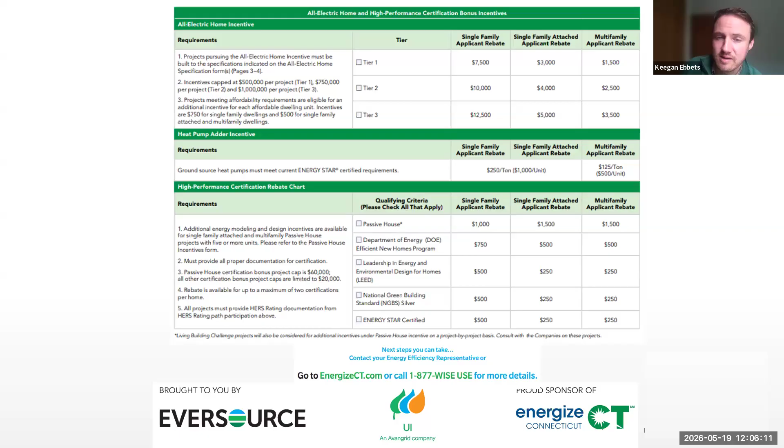Thank you very much, Keegan and Sarah, again for hosting and all the participants for joining us today. What we're going to be talking about specifically is emerging high performance glazing technologies. As building codes evolve and the landscape, as you all very well know, changes very rapidly, both windows and fenestration in particular are one of those levers that are very important within the building.

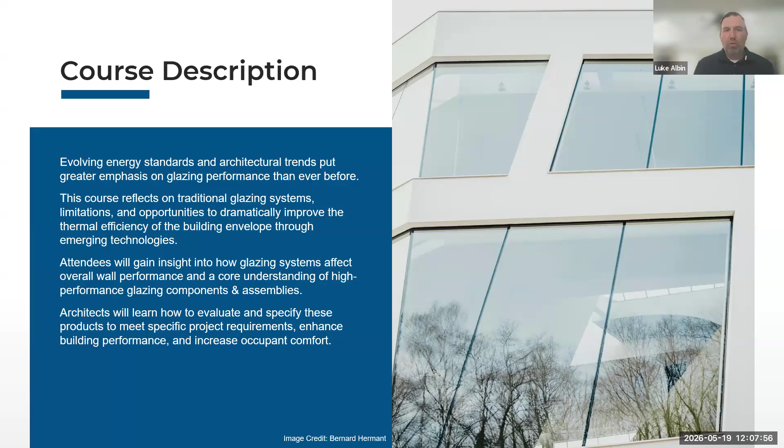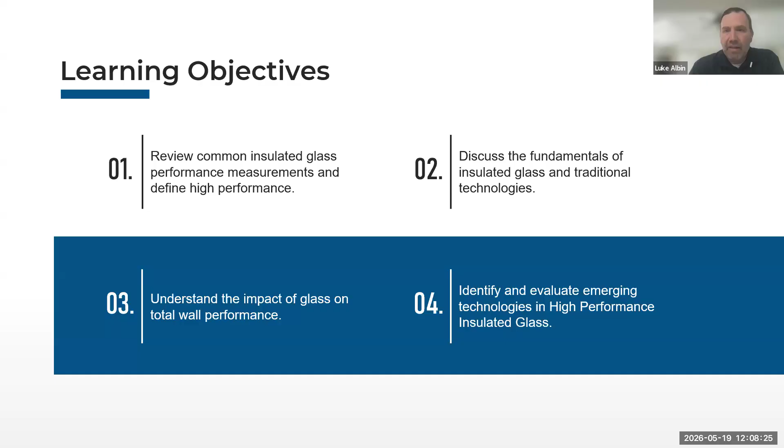So as I mentioned, we're going to be looking at insulated glass performance. This course really revolves more around the glass itself. There is some information on frames and other window materials, but really it's about how the glass interacts with the building, what those fundamentals are, and what we have in the market now that's really cool new technology.

So we'll start off with a quote from Amory Lovins. If you don't know who he is, you wouldn't be the first to say you're unaware. He's an American physicist, and was a co-founder of the Rocky Mountain Institute, a think tank which advises the Department of Energy on a lot of their building codes throughout the country, and has been doing it for decades. His quote: all of the energy pumped through the Alaska pipeline each year goes literally out America's windows.

So as a window manufacturer representative, this is a pretty strong statement. First inclination would be to defend against it. But when we take a look at glass and windows themselves, what we're looking for are a bunch of different things. We're asking the windows to do a lot.

We want to be able to see out. Obviously, nobody wants to sit in a dark room all day, so we want to be able to bring the outside in, as they say. With that comes thermal insulation and the comfort of the building occupants. That includes managing sound, UV rays, and potential condensation issues, all of those things being handled by the windows themselves, but it has to tie into the building.

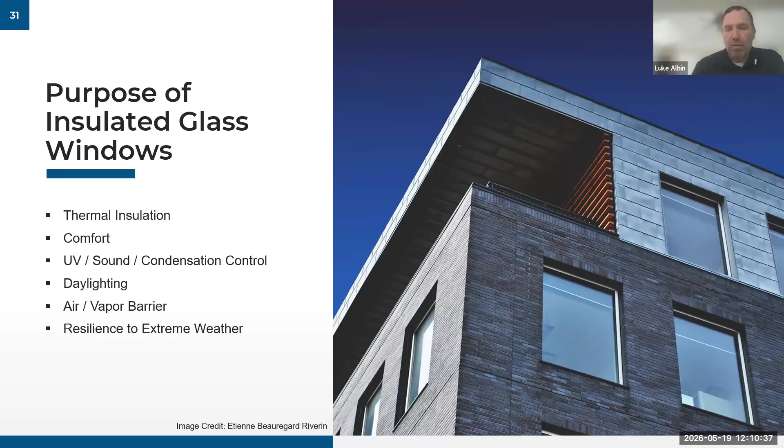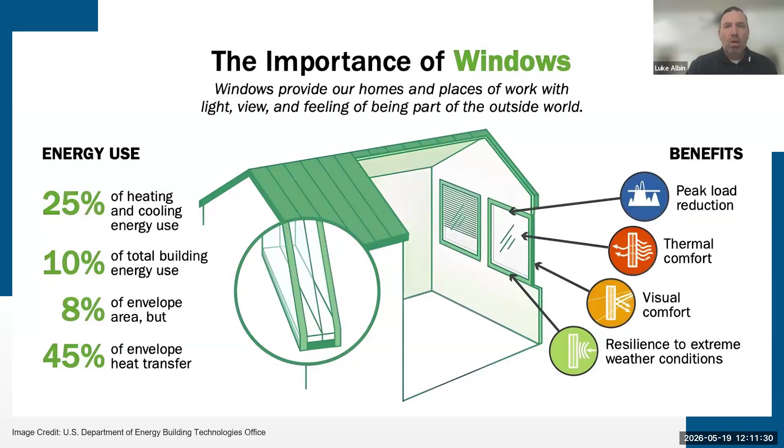Heat transfer - why are we concerned about it? Well, again, we're in a cooler climate zone, so we want to keep the heat in. Our heating season is much longer than most others, and heat transfer occurs through three ways. Conduction, which is through solid surfaces, so that's where the frame of the window comes into play. What is that frame made out of? Is it wood, fiberglass, vinyl, or aluminum? Is it thermally broken? A lot of factors happen there.

Also, the insulating glazing unit spacers themselves - what is the solid material around the edges of the insulated glass unit? Those are made of different materials, and those also have different rates of heat transfer.

Convection - where that lives within the windows themselves is primarily in between the panes of the insulated glass unit. So what we do is use gases that are more dense than air, so as heat tries to travel through the assembly, it slows down with those more dense gases.

And then radiation - we also want to be able to capture the passive heating nature of the sun. Radiation can also equate to heat, radiating out as well as radiating in. So we manage that primarily with low-E coatings within the glass.

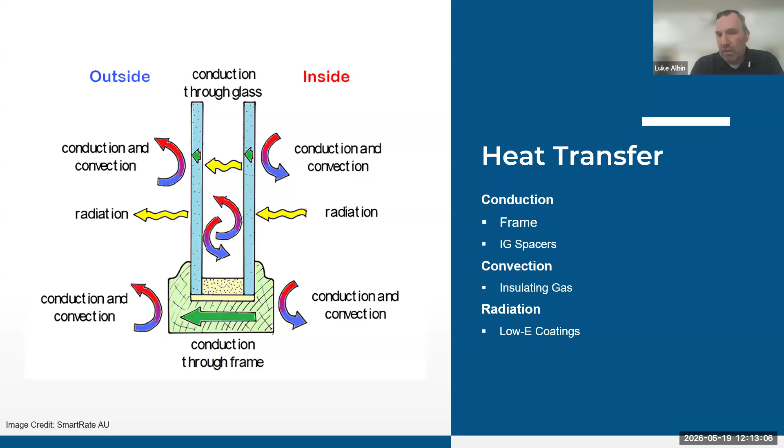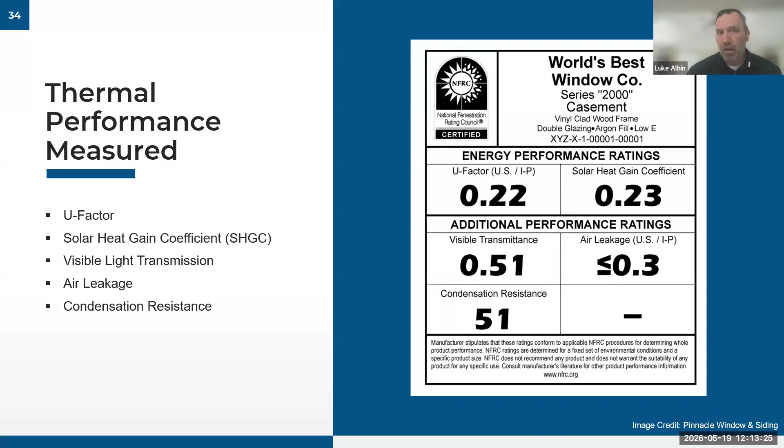I'm sure all of you have seen these window stickers that are on all new windows. This is from the National Fenestration Rating Council, and it's really just a snapshot of the thermal performance of the windows. So just to dive into these briefly - U factor. U factor is the insulating capability of the window.

It's an ASTM test. Those test parameters are 70 degrees inside, 0 degrees outside, 15 mile per hour sustained winds, and then that insulating capability is measured. The U factor is simply the inverse of the R value. So for example, in this case we've got a U factor of 0.22, which is just shy of an R5 window.

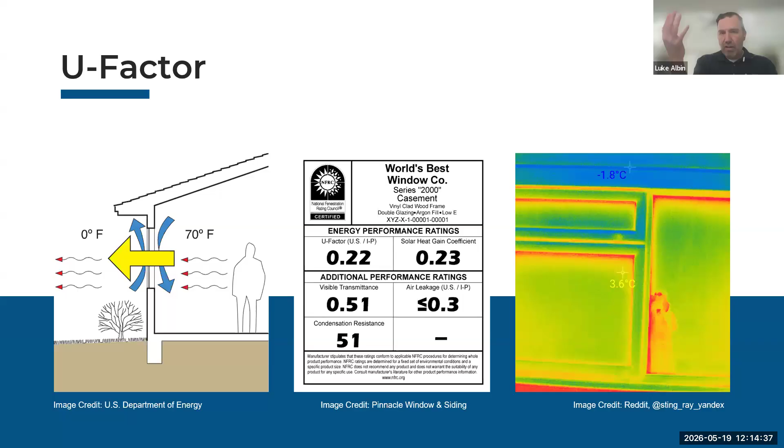You'll notice in the thermal image, this is from the outside looking in. You can see with the thermal image, the orange red areas are where heat is being lost from the building to the exterior. We're real close to those ASTM test parameters here. The orange red areas are where we're losing heat.

Solar heat gain is managed by the low-E coatings. As I keep mentioning, we're in a cooler climate zone, so we want to take advantage of the passive heating of the sun, whereas Florida, Texas, New Mexico, and similar climates want to do the exact opposite. Their cooling seasons are much longer than ours, so they want to keep heat out via radiation, which we manage with low-E coatings. Solar heat gain is that metric.

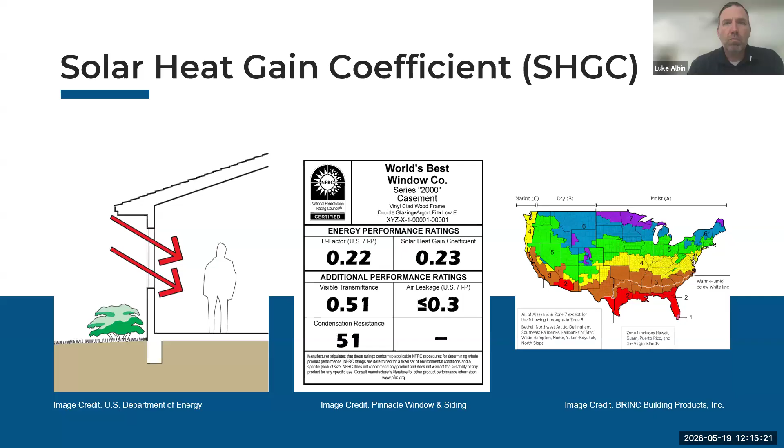Visible light transmittance, you see here, is measured at 0.51. That's our percentage, so 51% of visible light is transmitted from outside to the interior. Note that this measurement includes the frame, which you obviously can't see through, but there are also separate glass-only or insulated glass-only metrics, which you may see as COG, or center of glass, values for visible transmittance. So the visible transmittance of the glass in this window, factory assembled, is 0.51. It may be 0.65 for the glass alone, so something to keep in mind when specifying glass specifically.

Just to touch on air leakage - this is a very basic air leakage here, 0.3 CFM. When we're looking at high performance buildings, we're more looking at 0.03 and below, particularly with operable windows. Fixed windows are more like 0.01 and less.

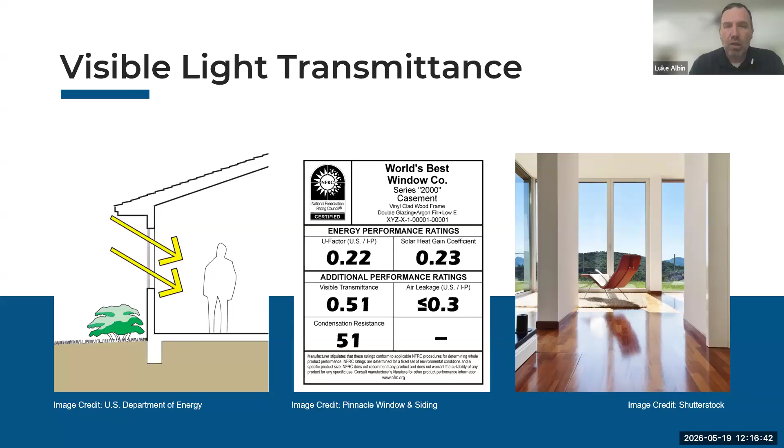Lastly, we have condensation resistance, which, believe it or not, is optional to be posted on these NFRC labels, but has the ability to be one of the more overlooked thermal performance metrics when looking at windows. The number here is 51 - the higher that number, the better the condensation resistance. Hopefully nobody has a situation in their own home like this picture here, where you see water on the interior.

I do, unfortunately - usually it happens in the fall when you turn the heat on for the first time. It's really a relationship between the relative humidity within the building, the center of glass temperature, but also what's going on outside - what's the dew point. There are a lot of different factors, but primarily the relative humidity within the dwelling, as well as the surface glass temperature, really drive the preponderance of condensation.

Just to give an idea of recommended numbers in some major US cities: say, for example, relative humidity within the building is at 40. Looking at the Atlanta area, this would do a good job at 50, 51%. I'm located in the Boston area, so we're really closer to 60. As you get into even cooler climates, you see it approaching mid-60s, even 70 in Minneapolis, for the recommended condensation resistance factor. Something to keep in mind.

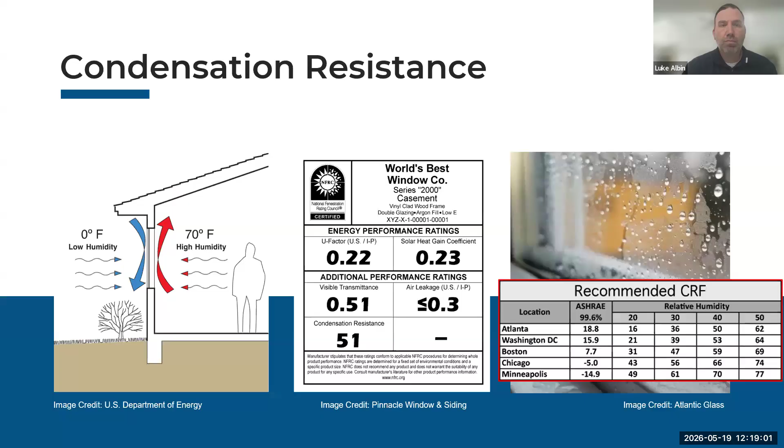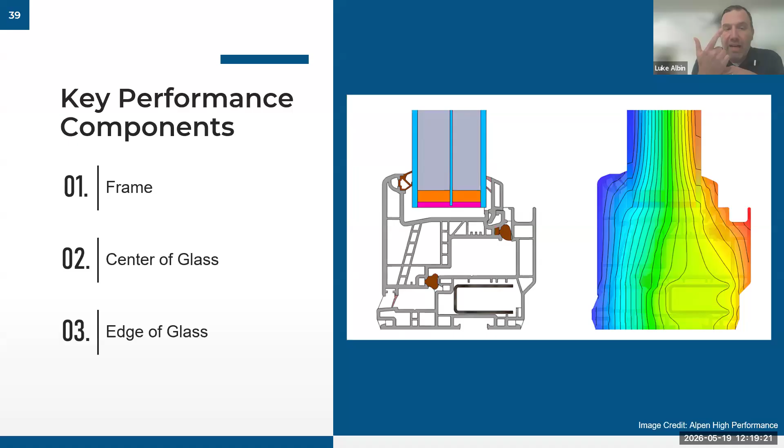So when we're looking at a window itself - and for those who have worked on PHIUS projects, you'll notice that if you go to their certified window database, some key performance components are pulled out and measured separately: the frame, the center of glass, and the edge of glass itself.

So taking a look at building codes and where we were versus where we are now - take Energy Star, for example. A little over 10 years ago, the Northern Climate U-factor was 0.30, and any solar heat gain was sufficient for an Energy Star rated window. Fast forward to today, and now we're at 0.22 with a recommended solar heat gain coefficient.

May not seem like a big jump, but if you take a look, well, 0.08 when you're talking about U factors, but remember when we're thinking about R value too. So your R value of that window, say a dozen years ago, is about an R 3.3. Now we're looking at an R almost 5 window.

That's a pretty significant jump, particularly for domestic manufacturers who have standardized on the geometry of a dual pane window system. That 0.22 number really reflects very close to the limit to which dual pane products can be, particularly again in our cooler northern climate zone.

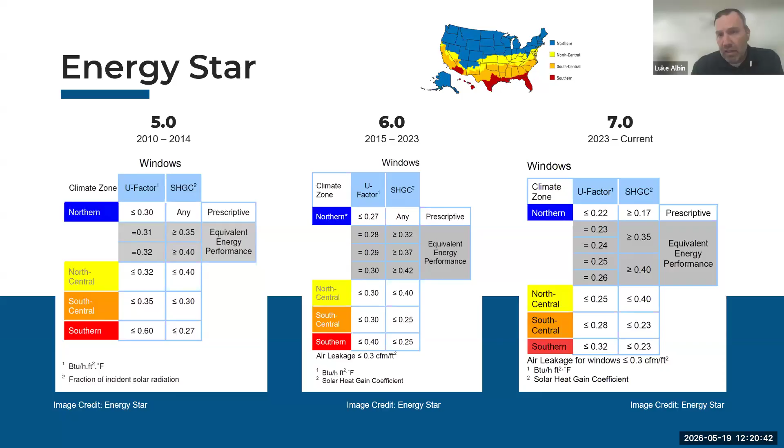For Canada, just as a base point, it's even a little more aggressive. So last year, all their residential windows, when you do their conversion, they're looking at a U factor of 0.21, and by 2030, their goal is to be at a 0.14. So 0.14 is you are 100% out of a dual pane system. Some customers are even looking at not only triple pane but quad pane windows to try to get to that number. But there are a lot of different strategies to get to that number.

Adoption of glazing technologies. Again, we're talking about where we were. So taking a look back at 1970, this gray line here, single clear glass, about 90% of the market. There is still, by the way, a tremendous amount of building stock out there right now, particularly commercially, that is just a single clear piece of glass.

It really wasn't until, and you'll notice, late 70s, early 80s, where this blue line, a double clear glass pack was used, really in response to the energy crisis here in the United States of the late 70s, early 80s, in the oil embargo time. Fast forward to the mid 90s, is really where the low E coatings took effect, and that's where we are today. Now, close to 90% is double low E coated windows.

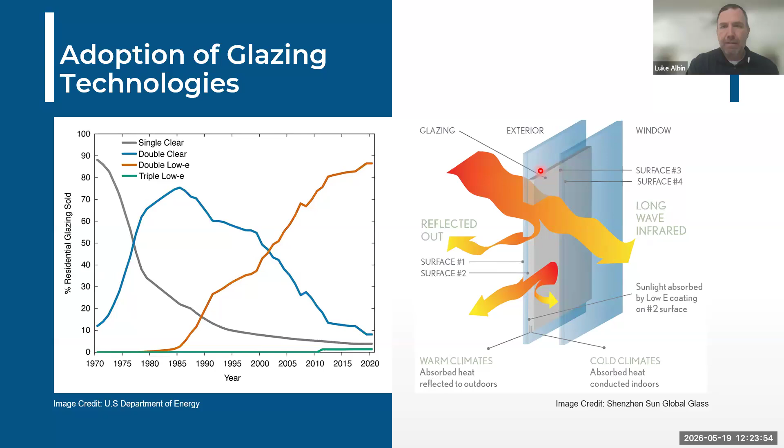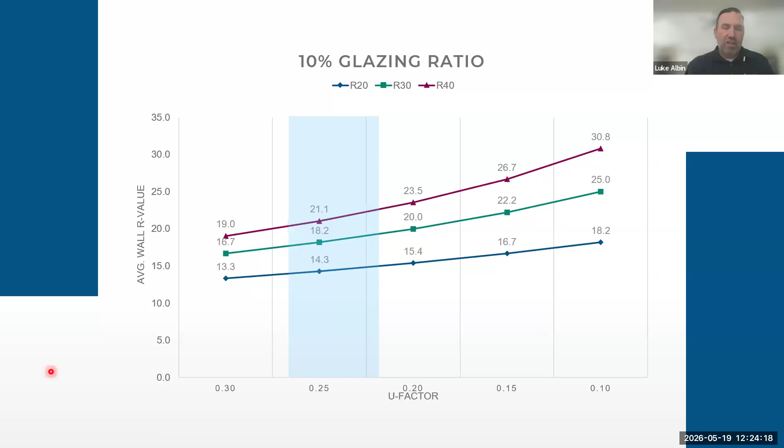When we put these windows in, how does it affect the overall wall assemblies? I know we're always trying to strive to get to a certain window to wall ratio. Well, this chart shows the average wall value, and then on the horizontal axis here, you've got the window U factor. So we're starting off at 0.3, and as you move from left to right, you get a better performing window. So this is a 10% glazed area. You'll see an R20 wall, R30 wall, and an R40 wall.

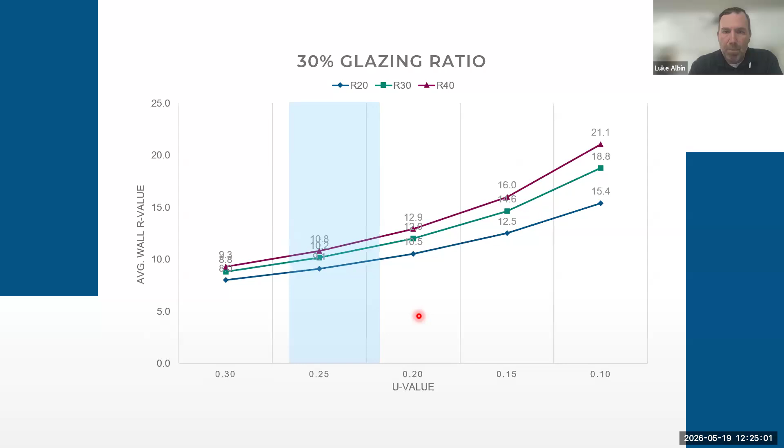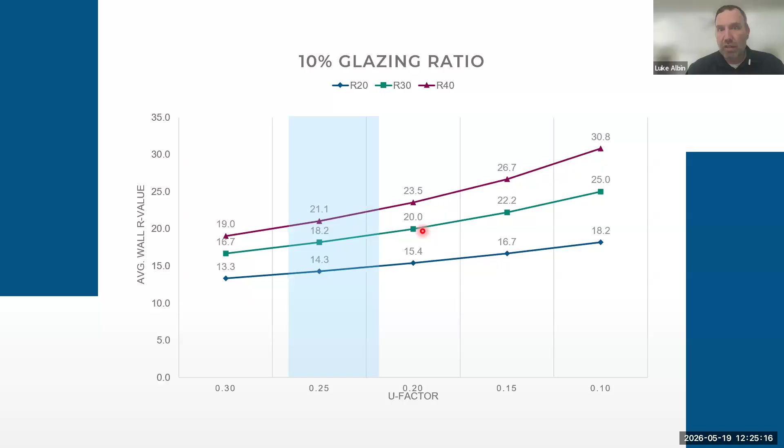But as you increase, just pay attention to this area here, between the 0.20 and the 0.15. As we move up from 10% to 20%, to 30% glazing ratio, you really can see where the windows are getting closer to the wall's R value. So you really have more of an exponential benefit to using higher performing windows to get closer to the walls. So as you see here, 20% and then 30%.

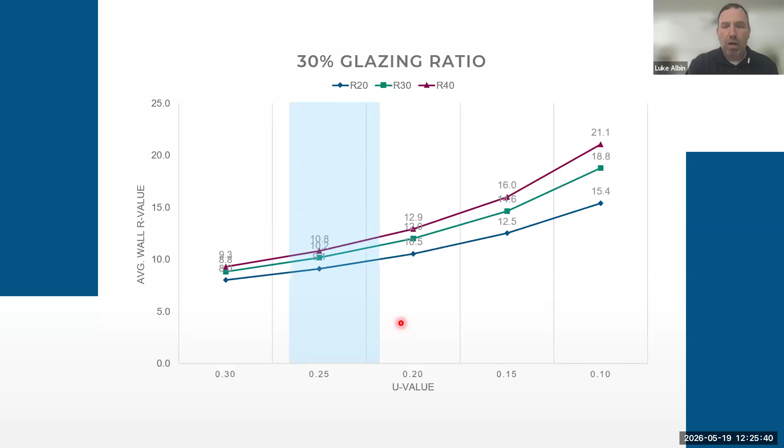So this is where primarily high performance windows will start off, between this 0.20 and below, again, because of the relationship with the wall itself.

So this is the only question here that we have in this presentation. But if we take this example, if we have a wall that is an R20 wall, 50% glazing area, and a window U factor of 0.30, which again, if you think about it, is an R3.3 window, what would that overall assembly of the wall be when you take in this equation here that you see?

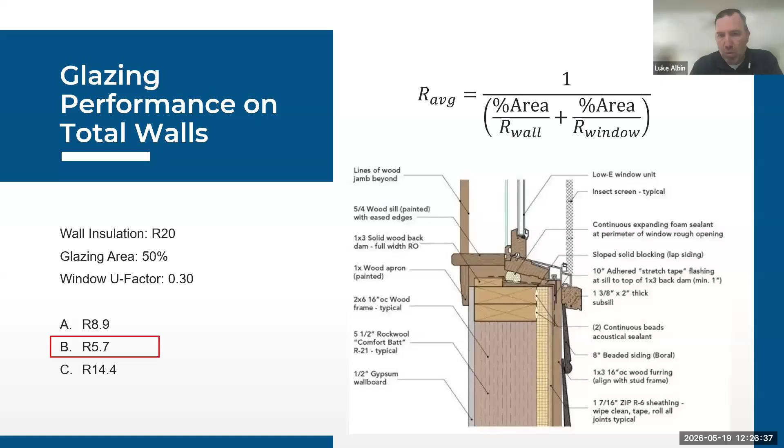Well, we find that with the R20 wall and an R3.3 window, the window has dragged this entire assembly down to an R5.7. So pretty significant difference there. Here's just a typical example of an R20 wall, detailed out. But we want to get better performance out of our wall assembly.

So what we're going to do is we are going to use R40 wall insulation. Same glazing area, 50%, same window U factor of 0.30. So when we do that, you see here's some extra material, extra labor, extra time to detail the R40 wall versus the R20 wall. A lot of different factors go into building this insulation out, as you all have probably run into.

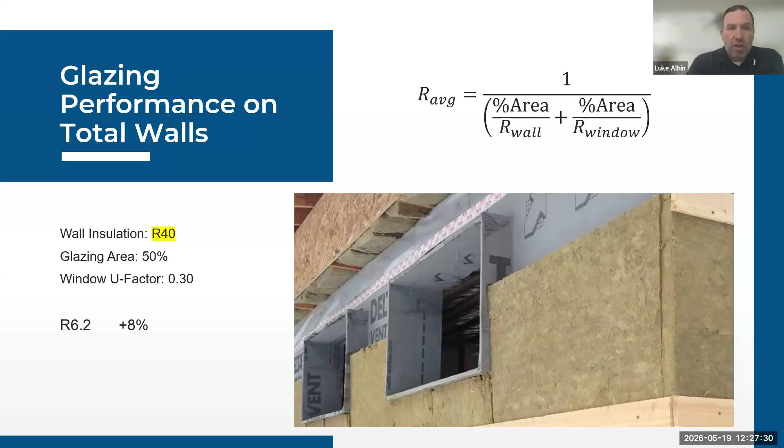So we've done all that, and now our assembly is 6.2. We've gained a whopping, not so whopping, I should say, 8% increase over 5.7. So instead, we're going to put a better window in. So wall insulation R20, same glazing area. But instead of the R3.3, we're going to use an R5 window. Now we've gone from 5.7 to an R8, so a 40% increase.

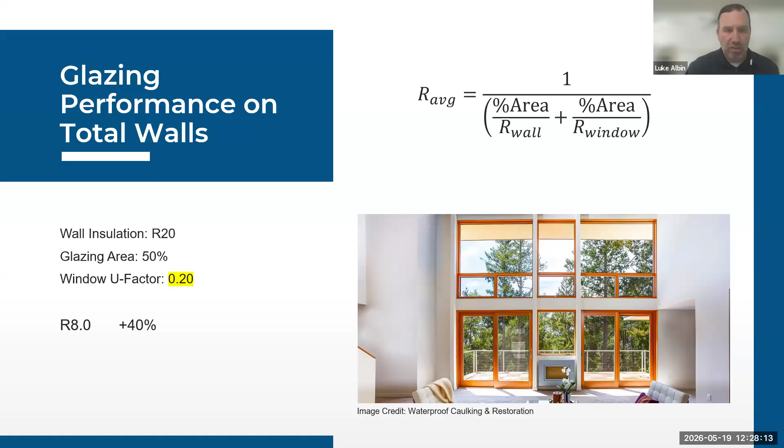So this is just to show how significant, and I realize that 50% glazing area is pretty substantial percentage-wise. But you can see that there's really a much more dramatic effect simply by using a better window than having to build out the wall insulation itself. So how do we get there? How do we get to that 0.20 number, or the R5 number and below? Well, the quickest, easiest, most efficient way to do that is to add another pane of glass. So instead of the dual pane, we are using a triple pane.

So you can see here, let me pull my pointer up. There it is. As we look at the triple pane here, you still have a low-E coating, shown in red here. What is nice about the triple is now we have the ability to add another low-E coating to the interior of the IGU. So we still number these again: 1, 2, 3, 4, 5, 6. Now we have a low-E coating on surface 2, and we have the option, or not, to have it on surface 5 as well.

In a dual pane system, thermodynamically, it's not advisable to have a low-E coating living within the IGU on surfaces 2 and 3, because one is a passive heating low-E coating, the other is a reflecting low-E coating, and it heats up this area too much. And so it's just not done within IGUs primarily for that reason. But with this barrier, you've got two separate areas, one more influenced by what's happening outside, one more influenced by what's happening inside.

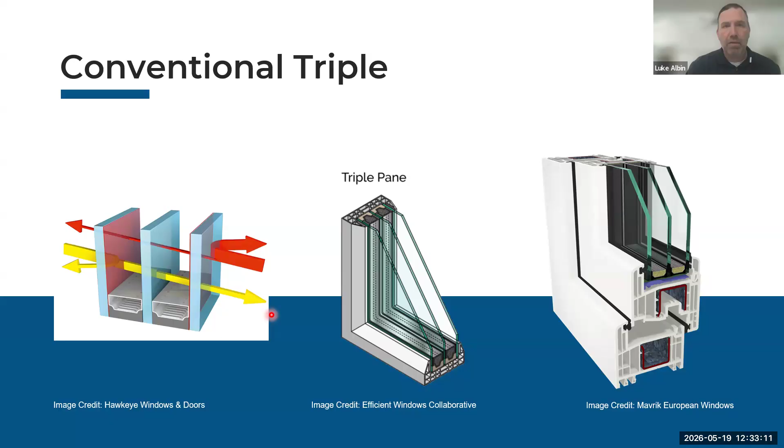But the other thing that needs to be considered is the weight. We're adding all that weight, so particularly on operable windows, we're also looking at upgraded hinging and hardware to support the weight of those operable sashes as well. But this is how we get to 0.20 and below.

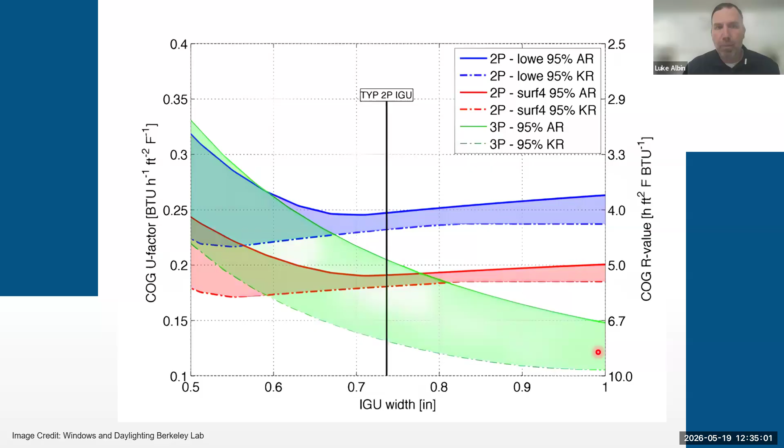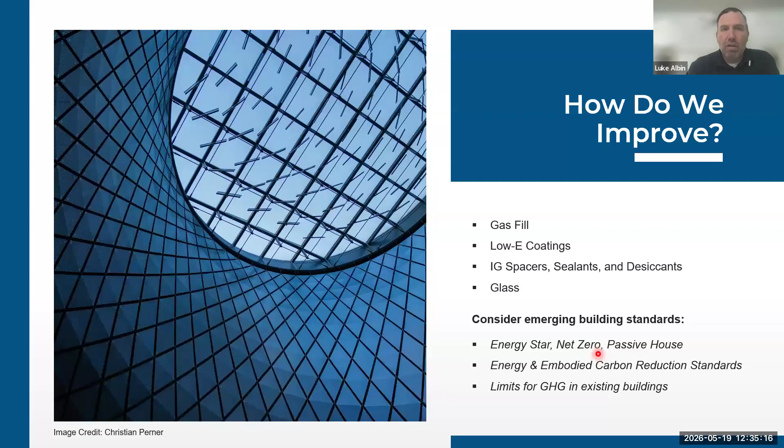So that's how we improve. But there's a couple of other things that we can do over and above adding the triple pane as well. And we talk about gas fill, which was referenced in one of the previous slides. So as I mentioned before, from a convection standpoint, we're trying to slow down the heat transfer. And we do that by using gases that are more dense than air.

We started off with air. We are now on argon as the standard. Argon is very cheap. It represents about 1% of the atmosphere. So it's very readily available, easily used in manufacturing. Really, this is the standard.

So much so that many times in automated lines, it's more expensive to say, you know what, I just want to go with air instead of argon. To turn off that function on an automated line is now a custom option. That's how standardized the industry is on having argon as a gas fill.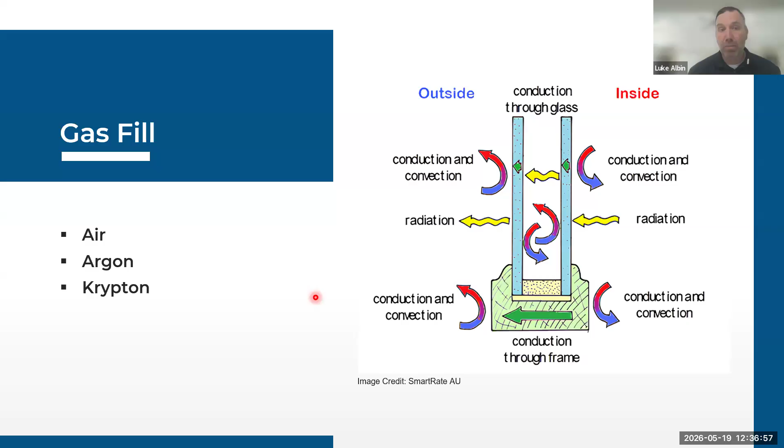And then we have krypton, which is about twice as dense as argon, a little less abundant, a little more expensive than argon. But if you had an opportunity to price those two out 4 or 5 years ago, there was a significant difference. There have been advances, not only in technology, but on the business side of things. There are some antitrust things going on. Krypton now is very affordable, or should be affordable, when you're looking at it compared to argon.

Xenon was used years ago. As I mentioned, argon is about 1% of the atmosphere. Xenon is like 87 parts per billion of the atmosphere - very rare, very expensive. They used to use a special cryogenics harvesting process for it. There are other technologies out now that are much more budget friendly.

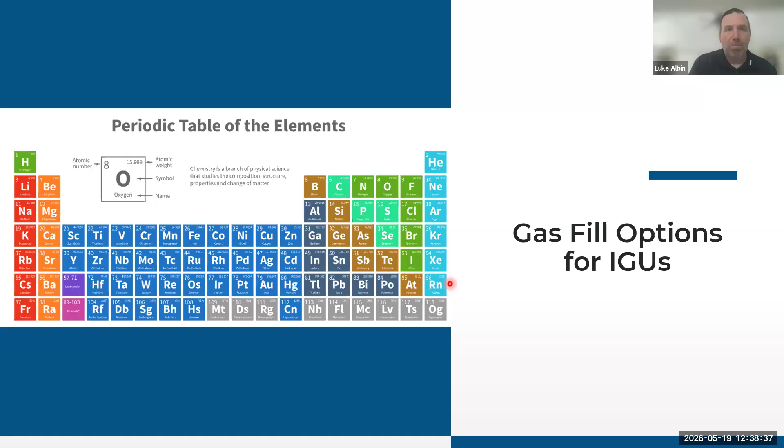So Xenon's pretty much been left to the back burner of IGU technology. And then, of course, radon, which hopefully nobody's testing on windows. So that's the gas fill.

Going back to conduction, and referencing when we talked about edge of glass performance, that's one of the three things that PHIUS and other high performance systems will pull out and measure specifically. This is what affects edge of glass - the spacer.

This metal spacer represents 90%, if not more, of what's out in the market. It's very easy to use, very easy to manufacture - just a stainless steel, flexible piece. It turns the corners, is easily manufactured and pliable so it can turn all those corners of the IGU. It's simply put in a bed of silicone.

This white area here is desiccant. There's a little bit of weep system, so any incidental moisture between the panes of glass during manufacturing can be pulled down into this desiccant area. However, as you can guess, metal is very conductive from a heat transfer standpoint, and that's what we're trying to get away from.

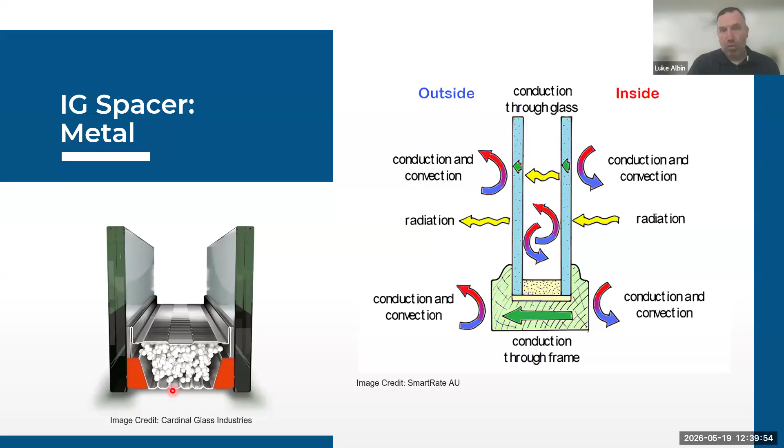Looking back at the thermal image from the beginning of the presentation, you'll notice these dark red and orange areas are around the IGU. That's where this metal spacer lives, and that's why we're looking at better technologies other than metal for edge of glass performance.

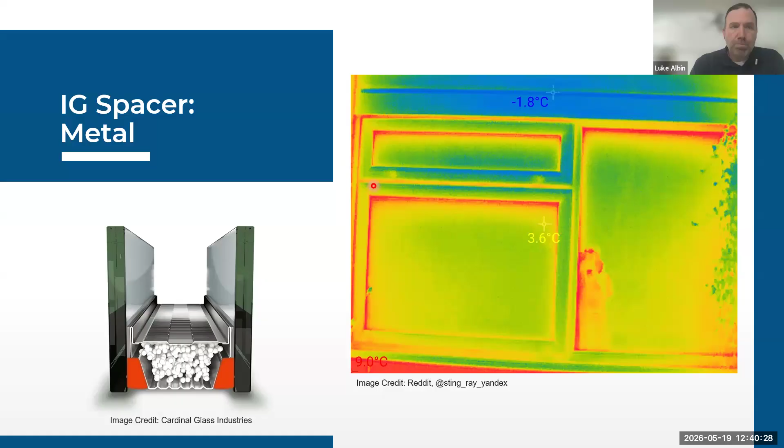Again, this is also a significant contributor to condensation resistance because we're talking about temperature versus relative humidity. So we now have, and have had for quite some years, the warm edge spacer. Primarily it's a dense foam product, and that foam has much less heat transfer than your stainless steel spacer. That's typically used within the high performance window range.

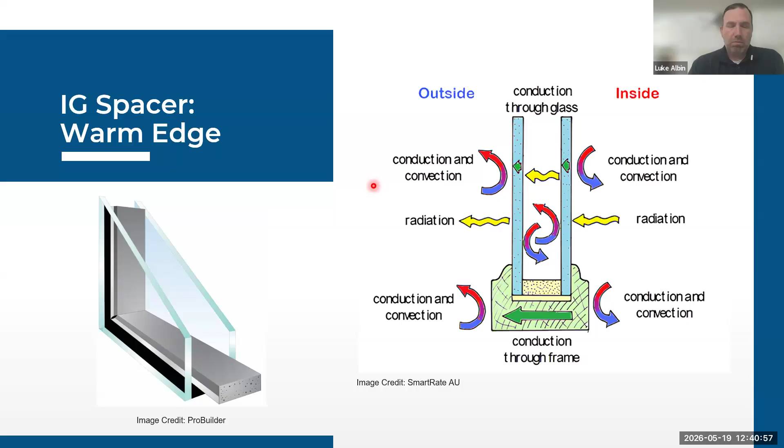But there's more - a subset of the warm edge spacer is the thermoplastic warm edge spacer. The best way I can describe it is it's almost like a hot melt glue that cures. What happens is it bonds itself not only to the silicone bed but also to the glass as well. When we take a look at our climate zone, that thermal expansion and contraction is happening.

Not only with the window frame itself and the interaction between that and the IGU, but also the IGU itself. As that flexes in and out with thermal expansion and contraction, the thermoplastic spacer moves with the glass. I'm sure everybody has had the experience of seeing a window that looks like it's raining in between the panes - that seal is broken.

Any gas that was in it has dissipated probably long ago. Condensation is building up on the inside, but that seal has failed. So as you can imagine, when you take a look at a metal IG spacer bar, it's not going to flex with it, and that's typically where the seal failures happen.

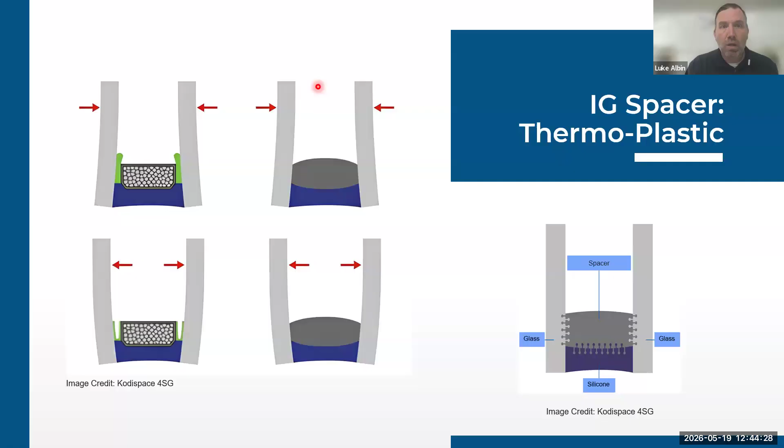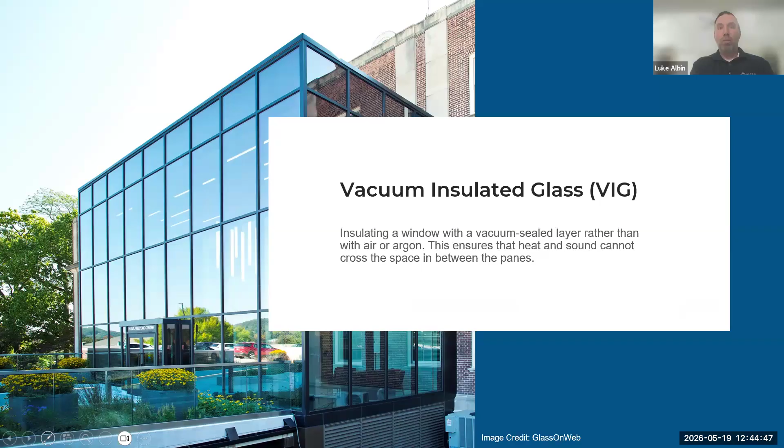So we talked about where the industry was, kind of where we are. Now it's time to talk about some really cool new technology that's out in the marketplace now, again in varying degrees. Vacuum insulated glass. I know this is making more and more of a push over the past couple of years. Really cool technology.

We're seeing a lot of this in the renovation space. As I mentioned before, we all know there's a ton of single pane, non-thermally broken aluminum frame systems out there. These can get down to almost a quarter of an inch width.

So when you take a look at a cross section of the vacuum insulated glass, you'll see here two panes of glass. There's this airtight edge seal that goes around the entire perimeter, and then a vacuum condition is created between those panes of glass.

So as physics will tell you, as heat tries to transfer through that vacuum condition, it's an excellent thermal performer. But again, it's a vacuum condition, so those panes of glass don't collapse on one another. There are little spacer pieces that are put in, little steel pillars, to keep those out.

So really fantastic technology. We see this a lot on the renovation side. One of the downsides of vacuum insulated glass is that it's very expensive. Most of it is being imported from Asia, and even in Asia, there's not a lot of it. Just to tell you how expensive it could be.

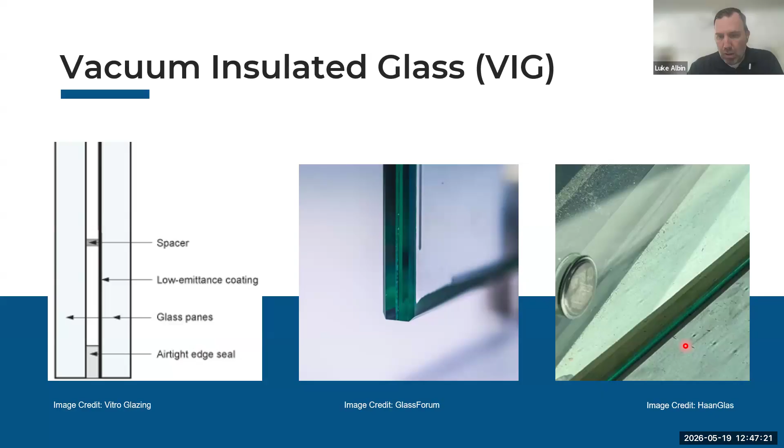The other thing is just from a condensation standpoint, there's not a lot to work with when you're looking at insulating that edge of glass. And those spacers - not that it's a big deal, but it could be an aesthetic deal. You see these little dots where my pointer is, in the shadow lines. You may see some spacer pillars.

If you're ever in New York and want to see this in action, the Tiffany and Company flagship store had beautiful original stainless steel window frames that they wanted to preserve, and they did, using vacuum insulated glass. They were replacing the single pane, just clear glass, and they used the VIGs and have real good thermal performance on that.

This isn't from that installation, but you'll notice, before the original windows and then after, there is typically some heat loss on the edge of the VIGs, but your center of glass is certainly a very huge upgrade over the single pane.

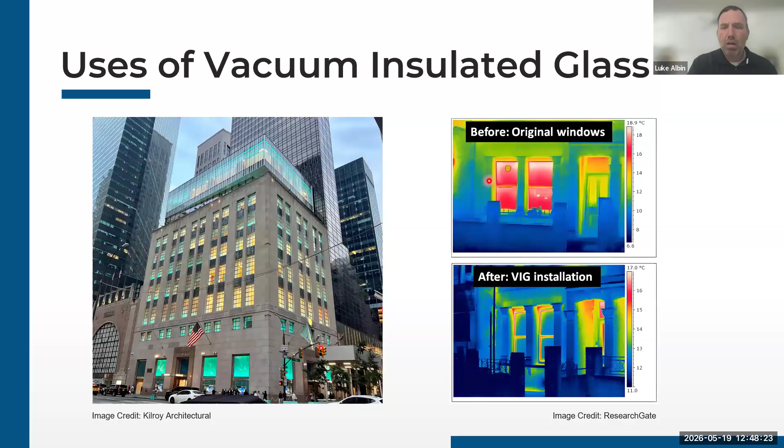To fit into new construction, what happens - and we have some manufacturers doing this now, that's available - they take the vacuum insulated glazing portion, add this leg on it, typically to fit into that dual or triple pane glazing pocket, and add that in.

This is going to be for a new construction window, so we can get that VIG technology into the domestic new frame windows. It doesn't add a ton of thermal performance, but it allows the product to be more universal to use. It's also adding another layer of expense onto it.

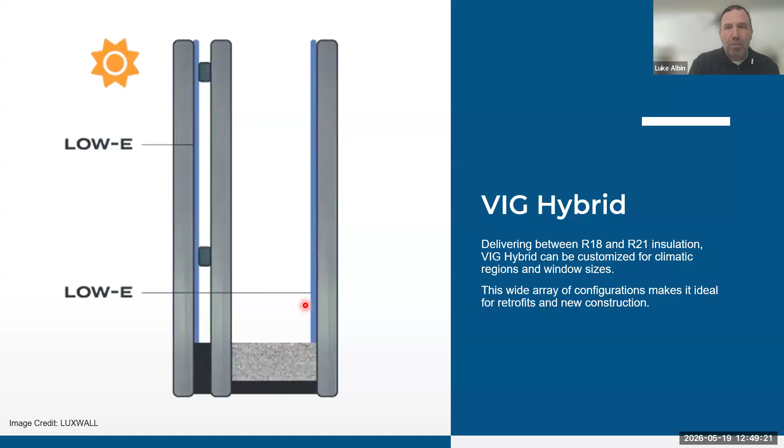But tremendous insulating factors - you can see here, vacuum insulated glass, your performance range is anywhere from R7 to R21 center of glass. Moderate scalability, again just because not a lot of manufacturers are doing it. And dimensions you can see there - 5/16 of an inch for just the VIG, up to an inch for the VIG hybrid with the extra leg on it. But very costly as of right now until we get our manufacturing efficiencies up.

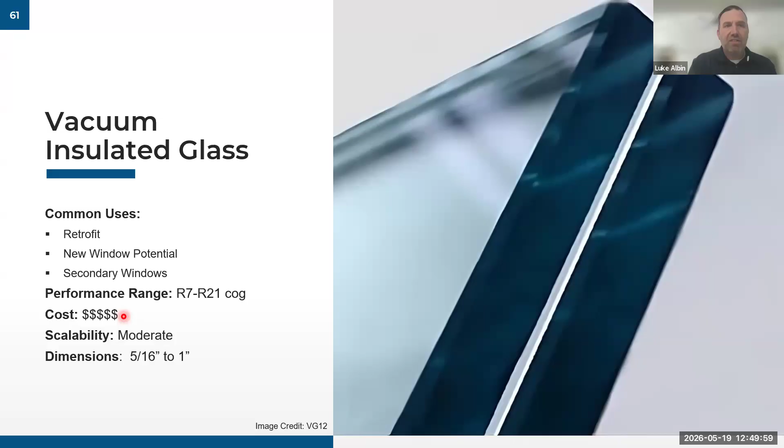Next, aerogels. You may have heard of aerogels from the space industry, because that's where they're used a lot. It's a super insulator in a very thin format. It is the lightest solid, like 95% air, but it is still a solid.

There's actually a company that started off at MIT. A group of researchers, if you take a look at AeroShield, it has this cloudy look to it, obviously not really conducive except for maybe a bathroom window. But to get that clarity, the group from MIT worked on chemical treatments, temperature, and pressure, and they've gotten it really to this format, which looks really good.

So it can be used in window format, the same idea still applies. We're trying to fit it into that dual pane system. When you take a look at a cross section, you've got the glass, the aerogel, which again is the solid, you still have a gas fill area, and then another piece of low-E glass. So as heat tries to transfer through this, this additional solid is really a super insulator.

I had mentioned NASA uses it on thermal blankets on spacecraft. Now in the window area, that group of researchers from MIT have started a company, actually based in the Massachusetts area, with some really good promising results from that.

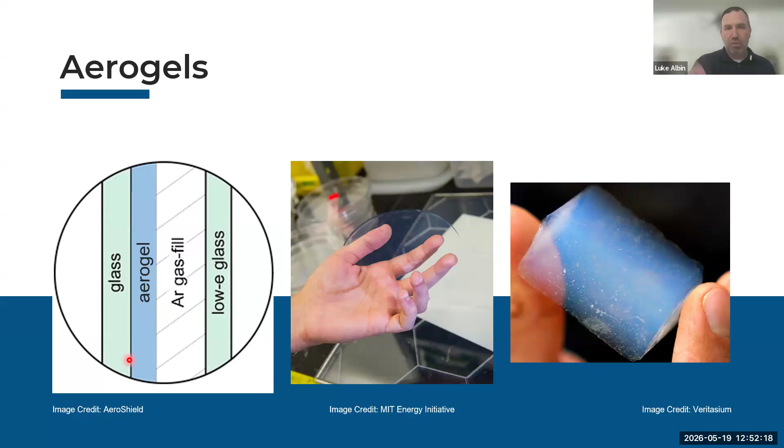When we take a look at kind of that overview of aerogels, R7 to R20 center of glass performance, again fantastic thermal performance to fit into the domestic conventional dual pane footprint. Again, moderate scalability, just not a lot of people doing it, and right now it costs a lot. But really great emerging technology in the market, and as they make more progress, it'll be an even better solution.

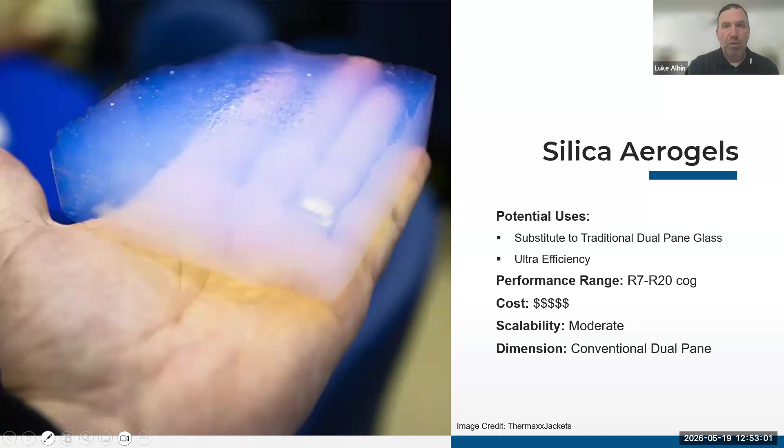Then last, we have thin glass. Thin glass is pretty unique in that instead of using that conventional triple pane system, a piece of thin glass is used. Where does the thin glass come from? Well, the thin glass is the same glass that is on your smartphones and flat screen TVs, half a millimeter to 1.3 millimeters typically, instead of the 3 millimeters where traditional glazing starts off. So you still get all the benefits, and they found you don't need that thick piece of glass to have the same thermal performance as a conventional triple.

That convection loop is still broken up by the piece of thin glass. The thin glass is actually more flexible than the thicker inner and outer lights, and there is no structural load on it at all. So chances are that's not going to break; the other panes will break first.

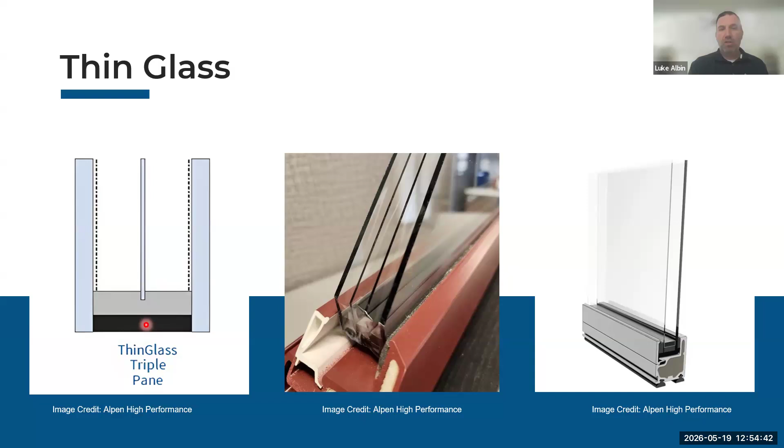It still allows for the two low-E coatings on the interior as well, and that can be used for renovations and new windows. This you see here is a triple pane. The triple pane thin glass can fit in as small as a 3/4 inch pocket, which is the traditional dual pane system, and a quad pane can fit in as little as a 1 inch pocket. So a lot of flexibility there.

It's made in a different process. You have your typical soda lime float process, but this is a vertical fusion drawn process. Corning is the primary supplier of this, but it's a stories-high glass waterfall, for lack of a better word. As it moves down, it actually cures, then the pieces are cut off, and you can get 50, 60, 70 square foot sheets of the thin glass. So very versatile.

So you've got a larger area that you can work with when comparing to VIGs or aerogels. The other thing is the weight. As I referenced before, particularly in operable units, installing very heavy windows takes a lot of machinery and manpower. You're almost saving a third on weight compared to a triple pane system. So there's large potential for larger operable windows without upgraded hardware and hinging.

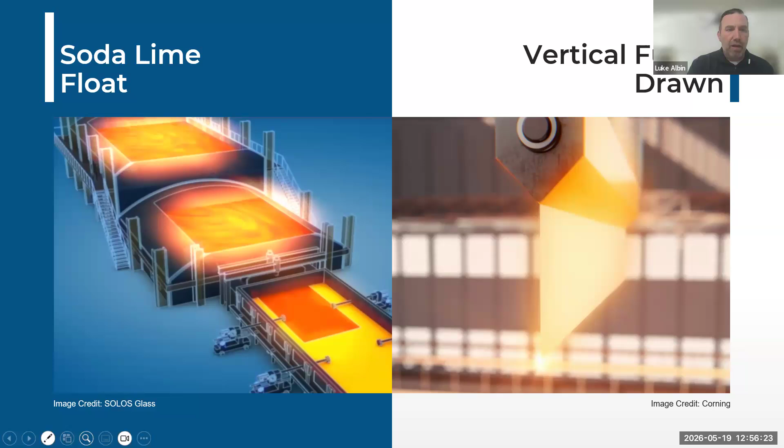Not as bulky of frames in many cases. So a lot of benefits to the thin glass, and this has been in the market for a decade. There's been a lot of work done with Berkeley National Labs on this, and there's really a partnership with the Department of Energy on it as well. So real good from a cost perspective in particular.

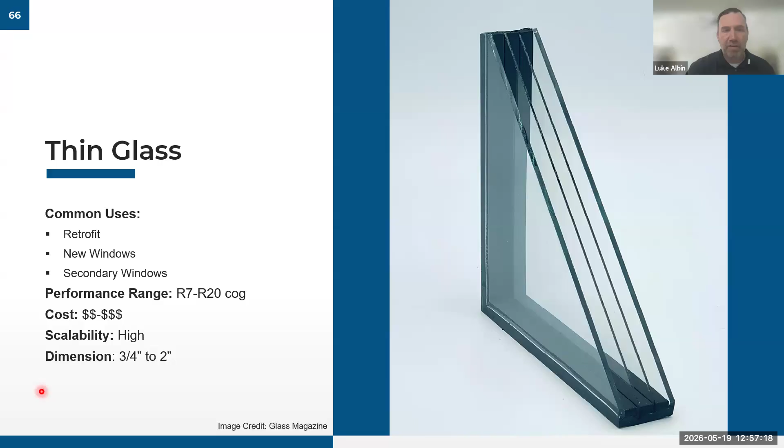Well, I should say it's glass. So it's just glass taken from one industry being brought into the window industry. So there's not a lot of special knowledge, special tools, special machinery that has the potential to drive up that cost.

So it's very, very budget friendly and very high performance minded. So when you take a look at cost versus performance, the VIG hybrids, VIGs, and aerogels are on the more costly side, great thermal performance, but right now really on the pricier side.

Whereas you take a look at thin triples and conventional triples, for most manufacturers, Europe's been doing it for years. They're pretty much standardized on triple pane. Here domestically, the industry is just standardized on dual pane, so to go to a triple pane is a custom feature. Most of the manufacturers that manufacture thin triples, though, or thin quads, have standardized on those, that's why the price is very comparable between the two.

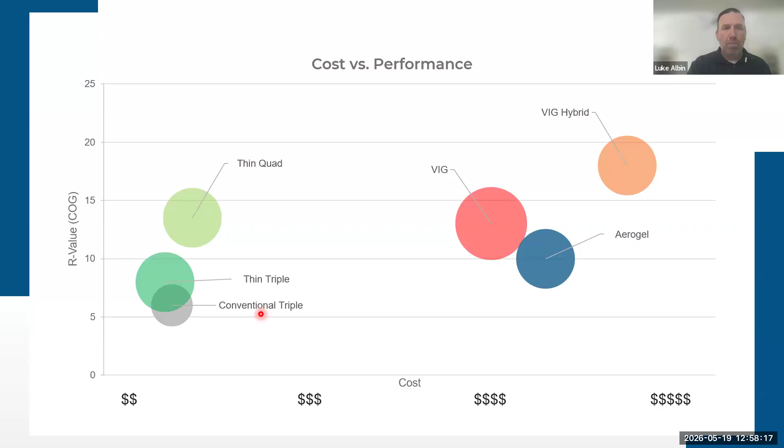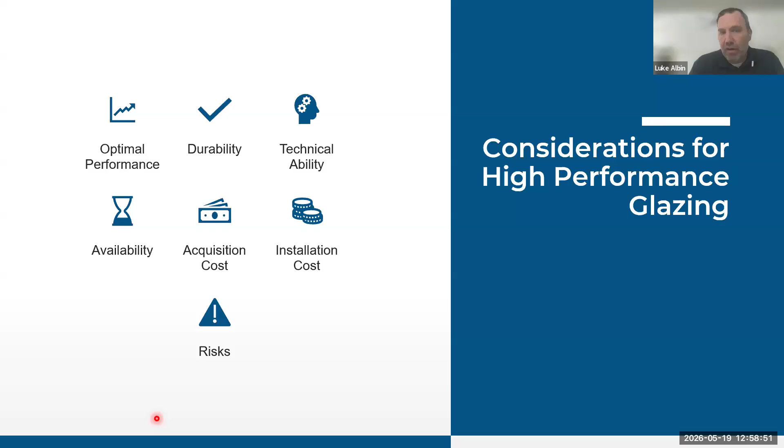With all that said, I really appreciate the time, I know we're running up on it here. There's always a lot of considerations for high performance glazing, you see some of them listed here. Budget's a conversation on every single project, yet to have run into one that it's not. But also nobody wants to be the guinea pig either, so there's always that balance as we move in. But those are why glass, in particular, in windows, are very important to the building envelope as a whole.